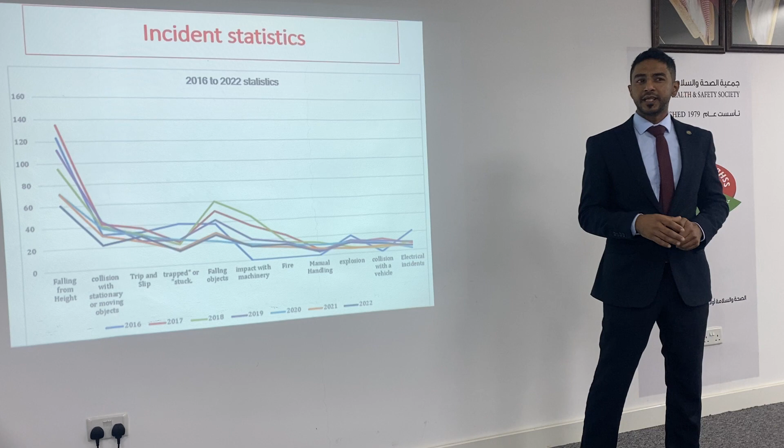So guys, let's spend a few minutes looking at this, then we will go forward. But I just want you to feel it. So there were 21 people who woke up in the morning as usual, to go perform work and never went back. Leaving behind them kids, wives, husbands, brothers, sisters, friends, and beloved ones.

The challenge is big for us as HSE practitioners. Let's have this new thing, and let me know later at the end of this session if you agree or disagree. As HSE practitioners, we are change managers. We are trying to develop a change, and when you try to develop change, you are faced with resistance. But it's worth it, because making change, preventing fatalities, preventing serious injuries, preventing this deep pain, it's worth hard work.

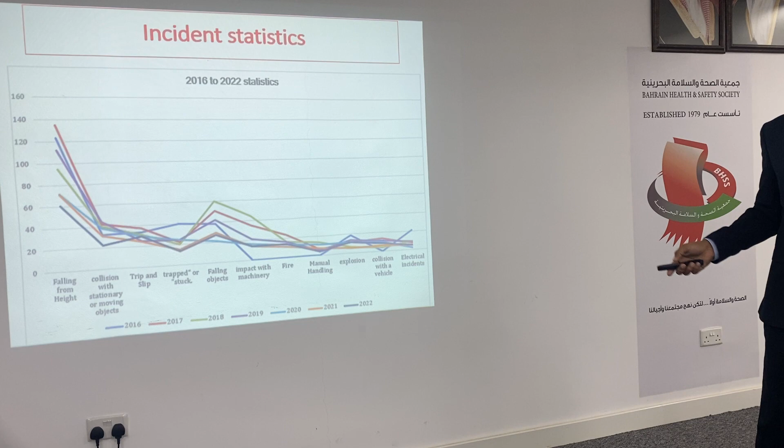Okay guys, so let's look at this. As you can see here, at the below, the years - this is the time span from 2016 to 2022. And here, as you can see, it's the cause of injuries or cause of incidents. And here are reportable incidents, guys. I know that the specialized guys know what a reportable incident is, but let me just clarify it for those who don't have background. So reportable incidents are incidents classified as majors - so sort of these are fractures, apart from toe or finger fractures, fatality, losing of sight, and so on.

See, guys, so as you can see, there are a lot of variables, but the common thing here, as you can see, is working at height. Look at this. We can see that there are some reductions, true, but working at height as a cause of reportable incident still remains the highest cause, and for 7 years. And it's not in Bahrain only, but worldwide.

Why I started with this - to tell you why we have chosen to conduct something relating to work at height. So scaffolding is not the only working at height situation where we perform work at height, but it's a part of it. I will try my best to summarize, guys, and simplify the stuff that we need to look at when we perform work at height.

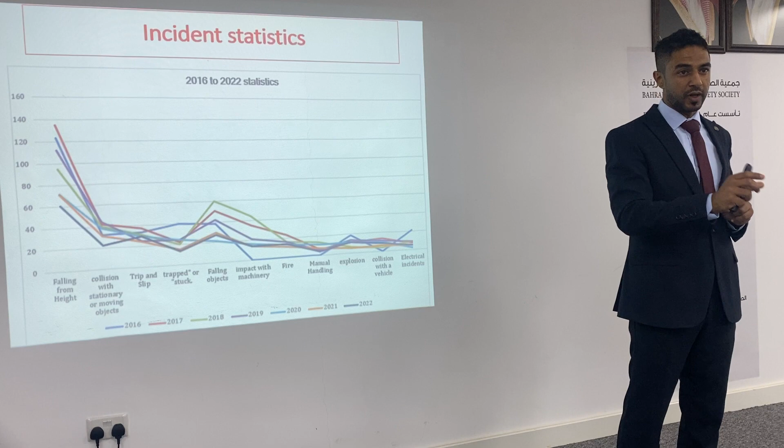Okay guys, so as Mr. Yasser said, he actually performed adequately about introducing myself, but let me just briefly tell you that my name is Ali Abdulla. I am a NEBOSH IGC trainer, HSA, and examiner as well, but for IG2 only, not for both IG1 and IG2. I'm also a trainer of some other awarding bodies like IOSH, HABC, ECITB, and so on.

So today, we will try to look at these stuffs. So this would be our agenda. You can spend a few seconds reading this. And due to time limitations, we are not going to go in depth, but try to cover the very generic and very essential as well.

So guys, let's start with this question. What are the factors that we need to consider to erect a safe scaffold? What do you think, guys?

The design of the scaffolding. Excellent, there's a design. What else? The nature of the job. Weight of the load. Excellent. Size of scaffolding. Excellent. Duration of the work. Ground stability. Excellent. The competency of the worker who works this scaffolding. This is also very important. So important, excellent. What else, guys? One more thing, type of the job. Type of the job, excellent.

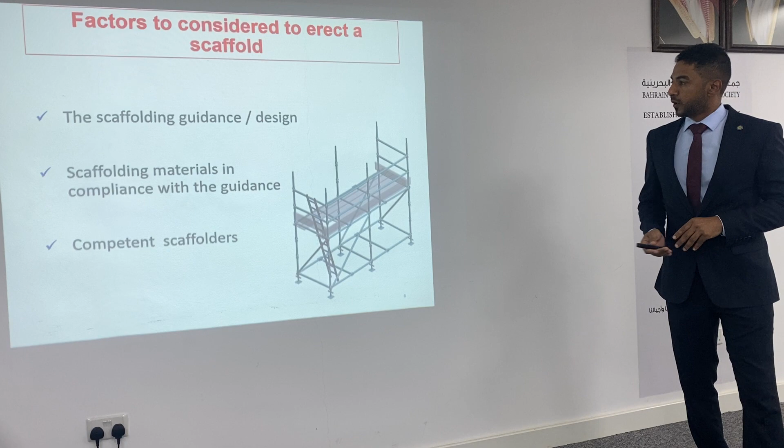So, for example, guidance. We've got these two guidance. The very first thing we need to determine is which guidance I'm going to use. Am I going to use tube and fitting guidance, NASC, or cup lock? I have chosen these two because they are very common. So what guidance am I going to use? That's the very first thing. Based on the guidance, I need to perform or erect the scaffold. The guidance will tell me how the scaffold will be safely erected to bear a certain weight. So this is the very first thing.

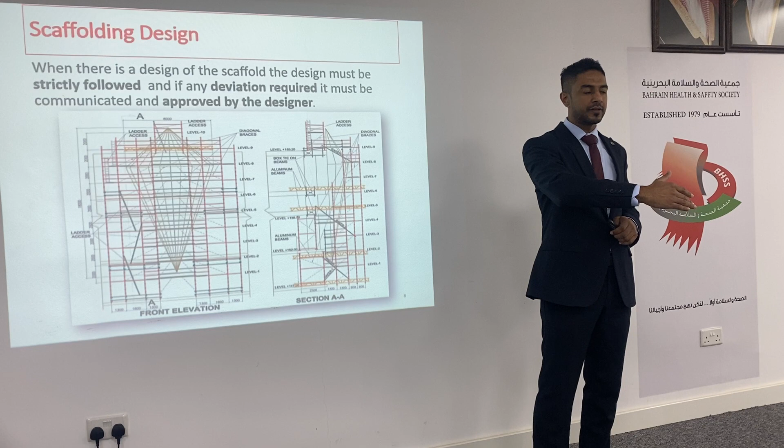Okay, let's now talk about the design. In both of these guidance documents, either TG20, the technical guidance of NASC, or the cup lock guidance, there would be a pre-designed scaffold. If we talk about tube and fitting, it's called a compliance sheet. So what is a compliance sheet? A compliance sheet is a pre-given design. It's a matrix that you use to have a scaffold which can bear a certain weight and can be used for that intended purpose.

Where there is no compliance sheet, a design would be required.

Let me tell you something interesting, guys. I believe at least the expert guys here know the types I'm talking about, tube and fittings and cup lock. Have you seen a tube and fitting scaffold or a tube and fitting mobile scaffold? You have, right? And what have you checked with it? The tag and this stuff, right? Let me tell you one fact: a tube and fitting mobile scaffold, whatever is erected, needs to be associated with a design.

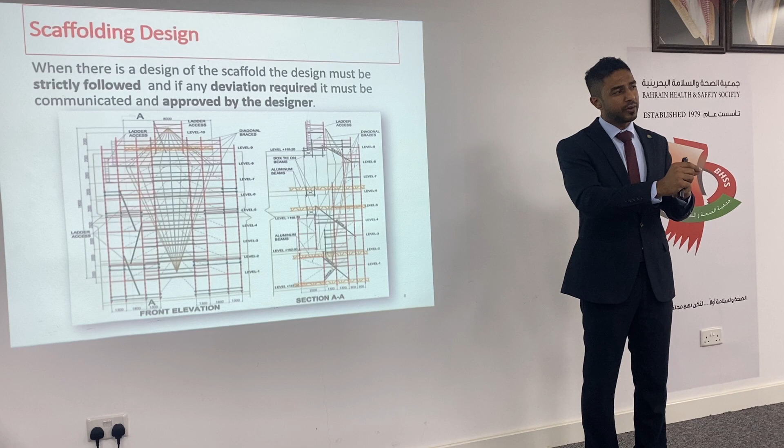Whichever is not designed does not comply with the guidance. Now let's go back to the sequence. That's why we start with guidance. Let's look at the guidance, understand the guidance, see what the guidance mentions. Then, as I mentioned, if there is no compliance sheet or no pre-given design, then we need to have a design. Basically, understanding the guidance will answer this question: when does the scaffold need a design, or when does the scaffold not need a design and you can just do it.

Okay, then material. Scaffolding material, right? Again, go back to these three things. The guidance will tell you which material to use. It might tell you, okay, use this material which complies with this standard, or it might tell you to use that material. Either the guidance or its design will determine what material needs to be used. And it will determine the spacings also.

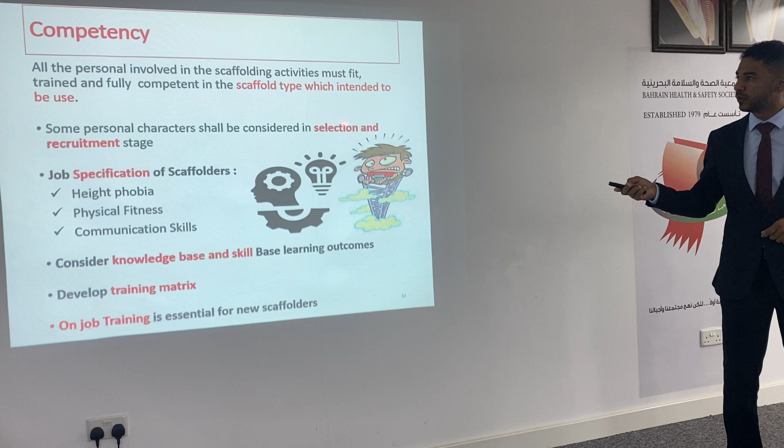In this area, we will just look at some stuff. So for example, if I'm using tube and fitting material, what is the practice here in Bahrain? You will send your guys to be trained as scaffolders, to XYZ training center. And what will happen there? They will train them how to erect a scaffold, but not all the scaffold.

And when we look back at the Ministerial Order 4, it says someone who trained or supervised by trained, but in which type of scaffold? Here is where gaps happen. So maybe someone trained in training centers to erect a cup lock system is then sent to the site and asked to erect a tube and fitting. And here is where mistakes happen, here is where scaffolds collapse, here is where people fall from height, here is where material falls from height.

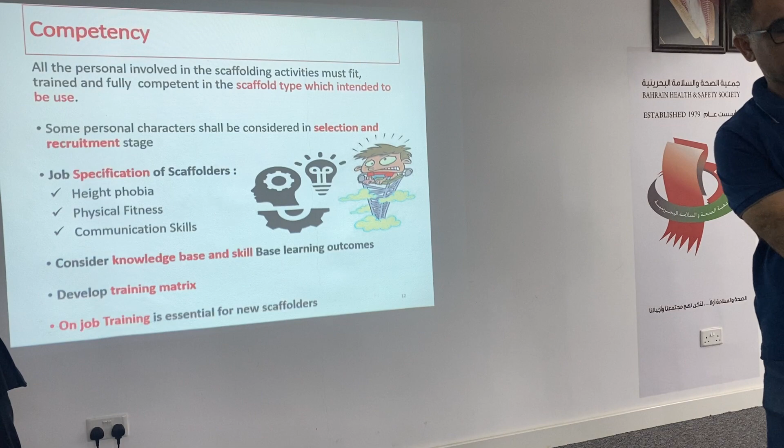So do you mean, Ali, that when you assign your guys to work training, you need to give the training based on your material, which is in your company, not a material that the institute has? So you need to go exactly specific, you need to mention specifically the type of scaffolding. Excellent, thank you, Yasser. So exactly what Yasser mentioned is what I refer to.

Now if you procure a machine, Mansoor, in your area, if I am trained in operating a machine in my company, would I be competent to operate the machine which Mansoor procured? Not necessarily, right? Like if I am trained in X machine, and Mansoor has Y machines, there would be a competency gap here. And here is exactly what I meant by competency.

So the guy needs to be trained in that particular scaffold which they are expected to erect, not something else. You train them in H-frame and you ask them to erect a tube and fitting or coupler systems, they will have a lack of competence. They will make errors, mistakes. Okay guys, so what else?

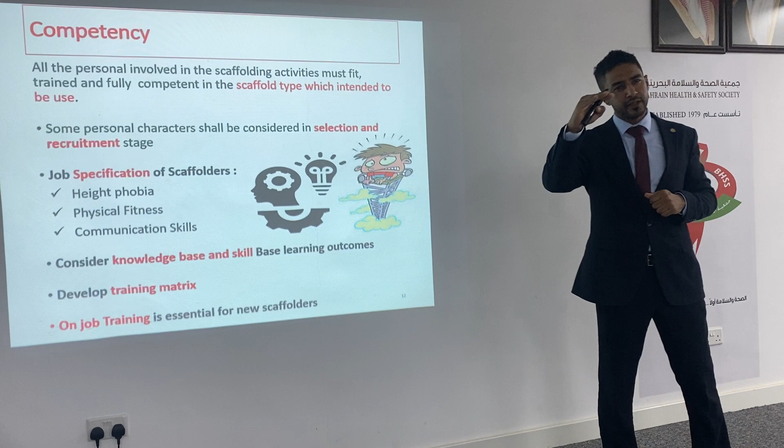So here, competency should be started at a very early stage, from the selection, recruitment, not later. Look at these job specifications. So, Mr. Habib, our HR manager, he is expert in this stuff. Can you, in 30 seconds, distinguish to us what is the difference between job specifications and job descriptions? Very briefly.

Job description or job specification? Specification, so it comes job description. Yes, it comes from job analysis, that specifies the role, responsibility, qualification, experience, and skills. Excellent, that's enough for me.

Thank you, Habib. So as Habib mentioned, you need to analyze the job. Based on that analysis, you will determine what vacancy we need to have, and what the job descriptions will look like. So here are some stuff, guys. That's why we talk about strategic approach. We mean it, we mean what that strategy is. We understood and we mean it.

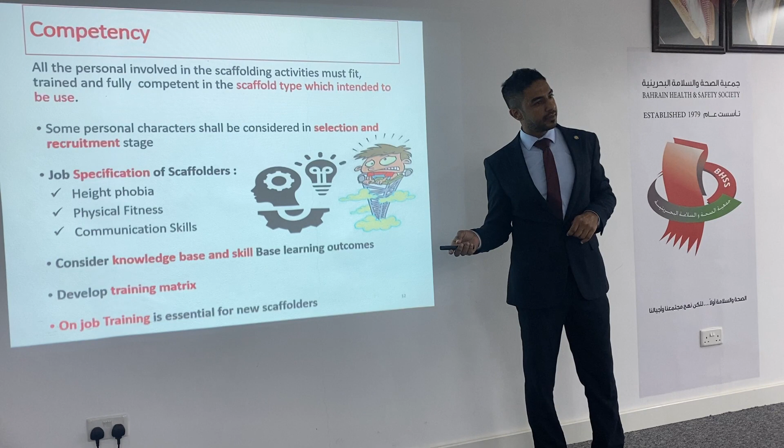So you cannot have someone who has height phobia recruited as scaffolders. Can we? No, right? You cannot go out. Then can we have someone who has pre-existing musculoskeletal disorders? No, no. And communication skills, at least some communication skills. The guys while erecting or dismantling, they need to have proper communication skills.

Okay, so all of these, like before recruitment, before employment, if you bring some people who are having something like this, they will never be competent, guys. They will never be fit.

Not because they are unfit, but because we did not consider the job specifications properly. So it should start there, at this stage.

Then when it comes to training, once I've selected the guys, we send them to the right institute or training provider, and they get trained on the right scaffold, using the right material.

Is that enough? Now I train you, tomorrow you erect a scaffold. Will you manage to erect a scaffold or no?

You will erect and put up a quality scaffold. If I bring any four of you and give you material, you will manage to erect it, especially a cuplock or system scaffold, since the way they're designed makes it so easy to erect.

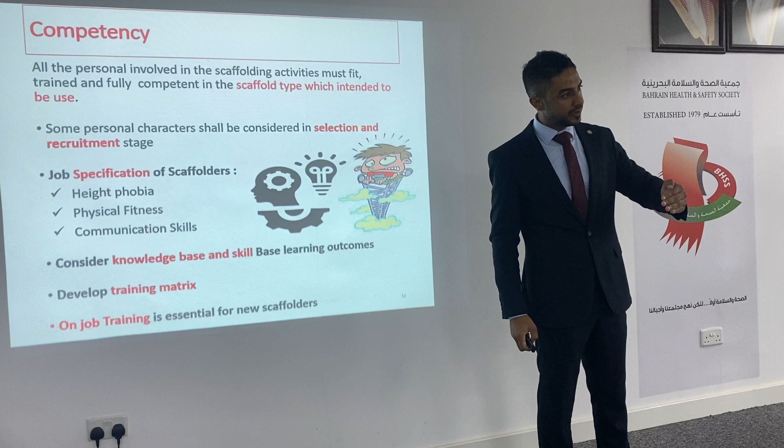So as mentioned, sending guys for 2, 3, or 4 days with training providers, getting trained on the right scaffolding materials based on the right scaffolding guidance, is inadequate. You need to consider not only knowledge-based learning outcomes, but skill-based learning outcomes too.

So for that, what we need is something called on-job training. You guys are expert enough to know how the scaffolding material looks like. Think about a standard post - is it light or heavy?

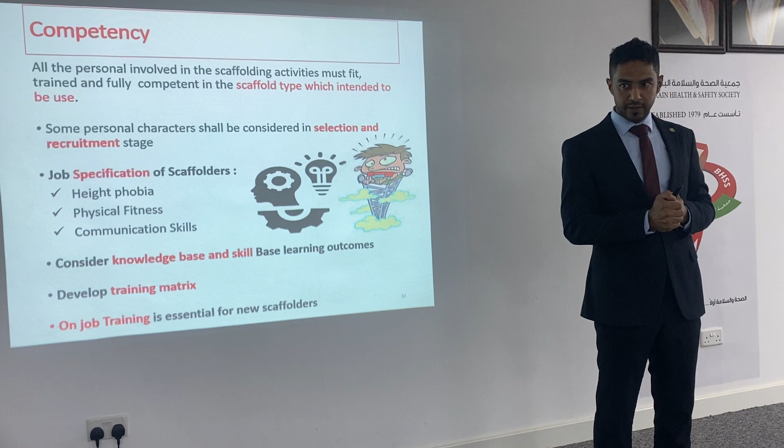Heavy, right? So think about someone who is a fresher - can he be fit enough to erect this or handle it? No, right? So after getting the right training, after understanding how the scaffold needs to be safely erected, you need to have them trained on the job.

Consider several months of on-job training, not just one week - a few months, 2 months, 3 months, where they need to work at zero level. Then, is that adequate?

Then you need to train them not only in how to erect the scaffold and use the materials, but also in several other things like manual handling, COSHH - control of substances hazardous to health - but customized based on the scaffold.

You don't just tell the guys, okay, consider this style, this task, this individual, blah blah blah, do this. No, it's based on the scaffold. There's a unique technique to be used when handling a scaffolding board or a scaffolding standard. They are unique, not generic - very specific.

So these are very important, especially for the expert guys. For you, you need to look at this and find gaps or areas of improvement in these three things. And you will find a lot - believe me, you'll find a lot of areas for improvement.

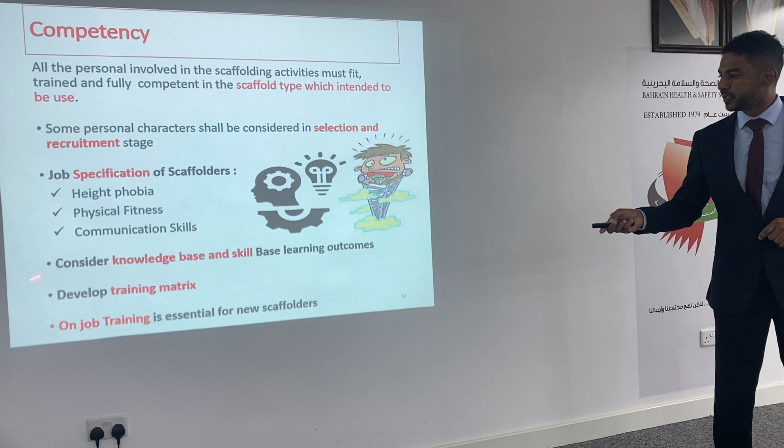As we mentioned, on-job training takes several months. And during these several months, you should be able to determine whether he's ready to erect or not. Can you give me an example?

For example, if the person is just handling material, do you mean that? See, handing over the material at the zero level, he can erect a scaffold. The scaffold can be erected from zero level. It can be, right?

And at this stage, you should be able to determine whether he's now ready, fit or not. So he will erect a tower for you, any scaffold, and you can have a sort of trade test to determine whether he's really fit or not - what I mean is that he's fit.

Let me correct you here - giving material and erecting at zero level. Yes, so he will be erecting at zero level. Yes, giving materials and erecting at zero level. So he will gain the competency - yes.

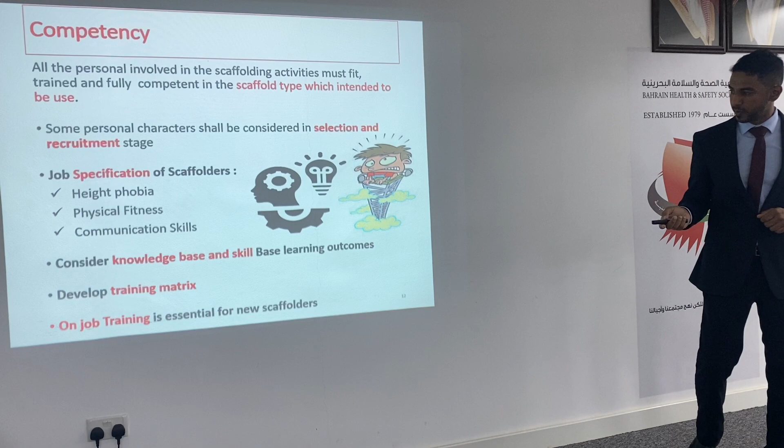The client should tell you exactly what the scaffold is intended to be used for - nature of the use, number of people, whether the scaffold is going to be sheeted or not. Let's take the example of sandblasting - they need to sheet it, right? So whether this is needed or not, the client should clearly communicate this.

If there are any hidden hazards - if the scaffold is going to be used on a site where demolition will be performed and there is potential asbestos, for example, or any hazardous substance - it needs to be clearly communicated. Also the nature of the ground, I mean any ground where the scaffold will be erected - I'll show you examples later. The client also needs to clearly communicate whether the ground is rigid enough to be stable, or loose.

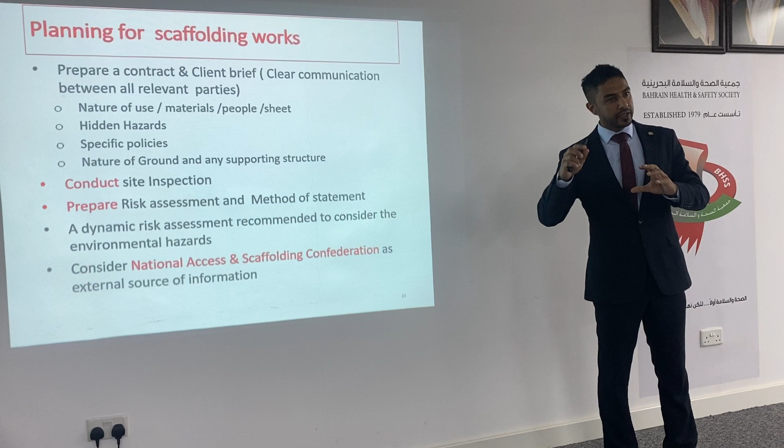Job specific - that helps fill these gaps and keep the risk assessment adequate and sufficient as required. So you mean, Ali, that every abnormal job should have a new risk assessment conducted? Every job, every job needs to be based on a new risk assessment. So every time you need to update it, based on the hazards. Yeah, so for each job we need a risk assessment, and for each task within that job we need a continuous or dynamic risk assessment.

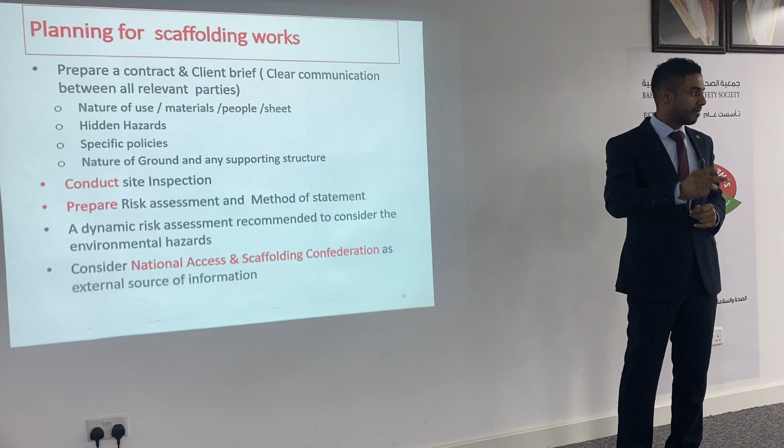It's situational. So I will erect a scaffold for Tatweer, I will give you the risk assessment. But you won't ask me tomorrow, 'Ali, we will have a scaffold in TB XYZ' - you might not ask me for another risk assessment. For this, what I would recommend is you need to have a dynamic risk assessment. If you're going to dismantle a scaffold, you need a dynamic risk assessment, which will serve to fill these gaps, as I said, because there's a lot of variety.

So guys, how do we perform risk assessment? We refer to sources of information, either internal, guidance, or whatever. When it comes to scaffolding, there are good sources of information you can refer to, and you can take pictures of these. It will help you. The National Access and Scaffolding Confederation has a wide range of safety guidance.

What's the time, Abu Ammar? It's almost half an hour.

Okay, so here are examples of foundations. So you guys, as experts of scaffold, will say, okay, this scaffold will be adequate to bear this much weight - but what about the foundations? So here the communication is required between the client or between the requesters and users.

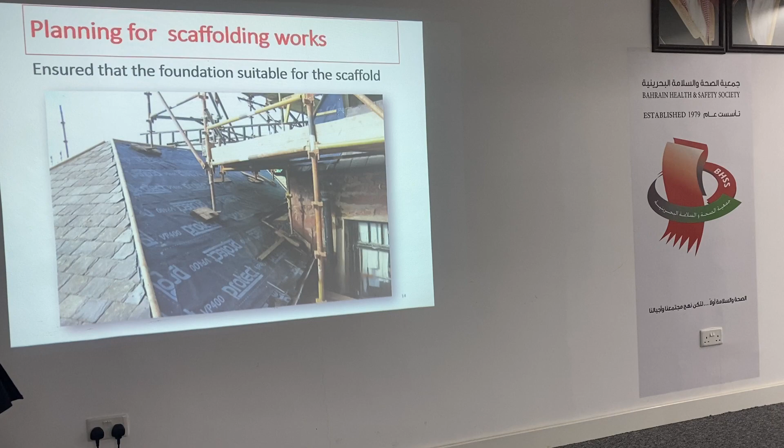Okay, here are some of the technical stuff. I will go a little bit fast to manage the time. So here are some standards, right?

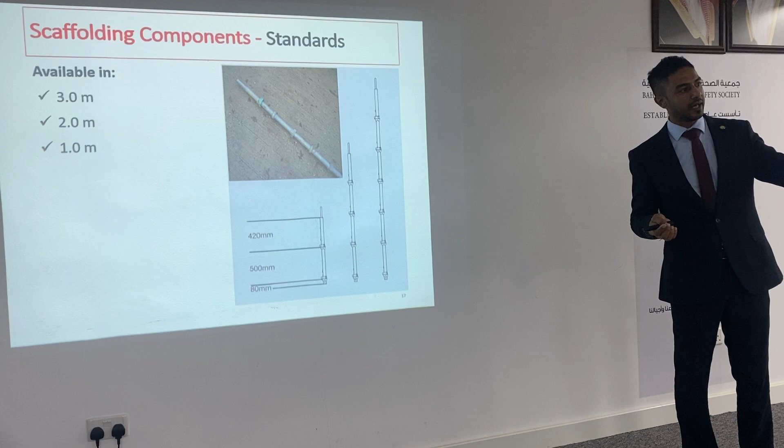This is for cup lock, guys, and it's available in these sizes. How to count the height, let me give you this idea: count these cups, divide into two, and you will have the height of this cup. So from here to here is a meter fifty centi. Sometimes you want to count how high the scaffold is, you can do this trick.

Okay, these guys are called what? Universal base. Okay, transom.

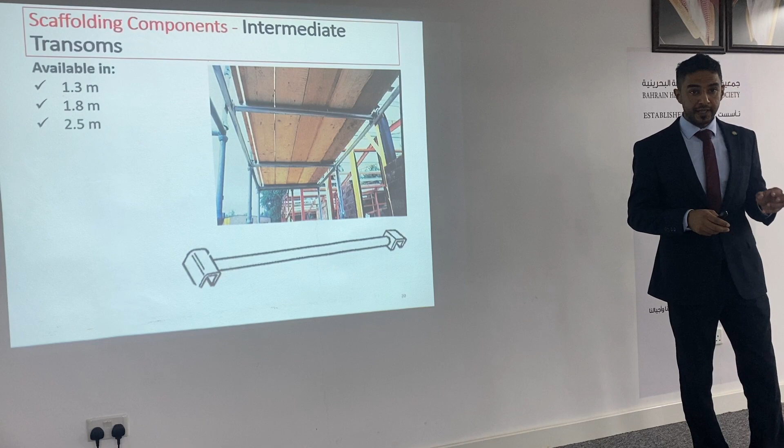So again, the guidance based on the intended use of the scaffold will determine how far transom to transom will be, based on the duty of the scaffold. We will see later how we identify the type of scaffold and the duty, the load bearing.

Also, sometimes you will have an overhead power line that can pull them, and also sometimes over uneven floor it will be difficult. Heavy also, excellent. So all of this stuff, right?

I'm sure if you think about it, you will find tens of them. But let me tell you one fact also: the caster wheel has a load capacity, of course, it's designed for static load, not for dynamic or moving load, right?

When you push a scaffold, especially cup lock or other systems, what will happen? When you push the scaffold like that, you stop. What will happen? The scaffold will stop, right? It will jump like something like this. Excellent, Mansoor, what will happen? The stop from the scaffold at the base will stop, but not from the upper part.

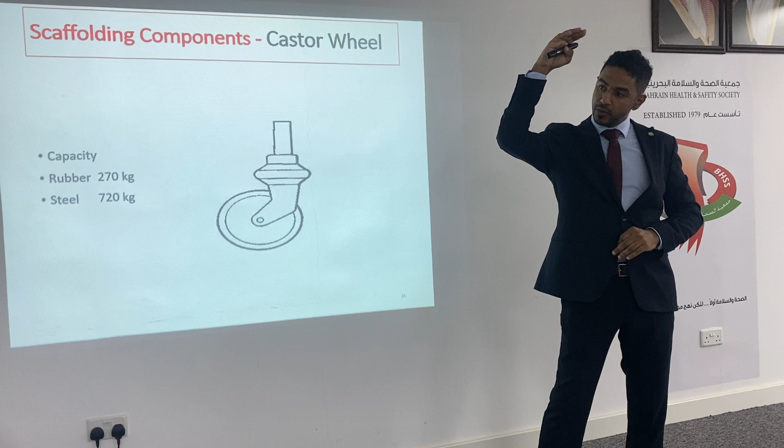Upper line, there would be movement, not vibration, it will still be in motion, right? It's movement. There will be like kinetic energy, where these parts will get broken and where it will collapse, right? So you can add these guys for that.

So later we will talk about the types of ties, scaffolding ties, but take it from now: any scaffolding ties must have this, not this. Not swivel, right angles.

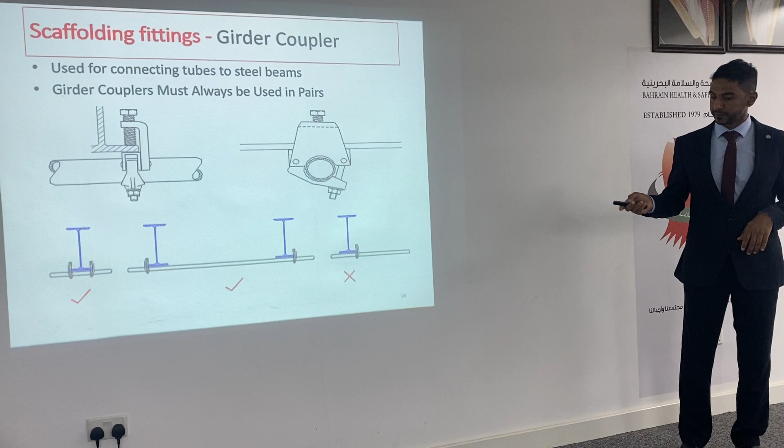Okay, putlog, guys, sleeve. Okay, this is called a girder, used to tie the scaffold with structures. What we need to know about this one is it always needs to be used in pairs.

So what is wrong here, guys? It's not in pair. So always you need to, if you have one here, you need to have another one here.

So if you follow the TG20 technical guidance, it will tell you using that... this is called TG20, guys, this is the technical guidance of erecting a tube and fitting scaffold.

So it will tell you that using some thickness, it will determine the distance between transom and transom.

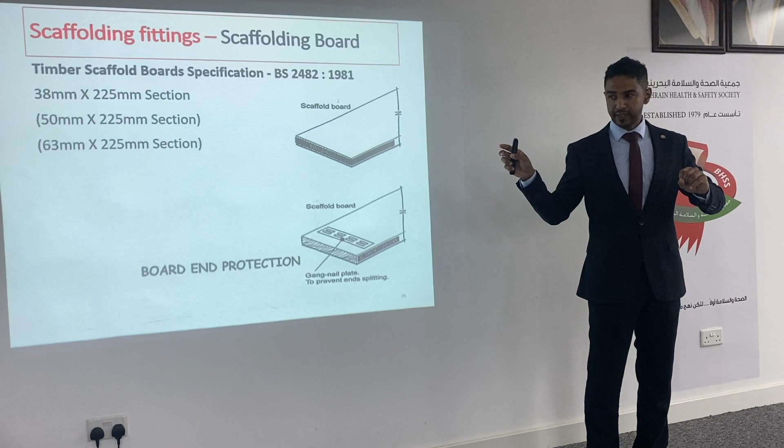So that's why if you are going to inspect a scaffold which is being inspected by a competent scaffolder, here's where we need to do, right? We are not inspectors, we are HSE practitioners. As mentioned in the announcement shared by Yasser, this course, or these sessions, is for HSE practitioners.

So if there is a scaffold being inspected, green tagged, and you have seen different thicknesses of board, you raise the flag, something wrong. You can do so, guys.

Okay, anything like that, guys, should not be used. It can be used in one condition: if it's used as a toe board or as a sole board. Anything like that, guys, should not be used.

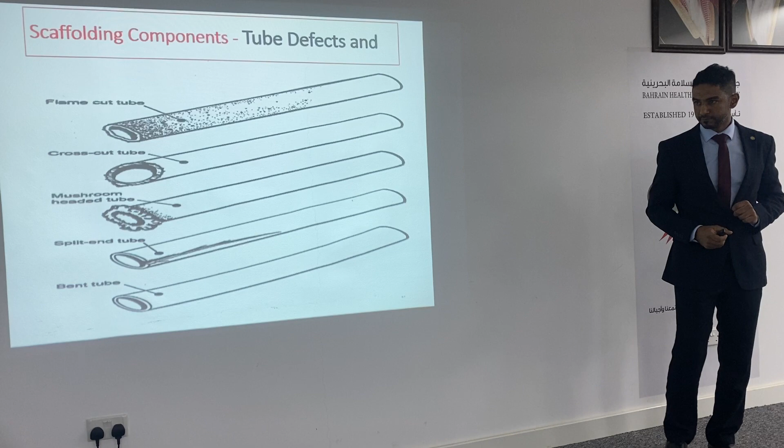Okay guys, so here bracing guys. This is stuff called bracing. Champion, you have 20 minutes.

So in bracing, what I need to inform you is that the scaffold must be braced. People do brace the scaffold, which is excellent, outstanding, good job. But sometimes they brace it out of the node point. This 300 millimeters from where the ledgers attach to the standards is called the node point. It is the strongest area, and here only, all the ties, all the bracing should be attached.

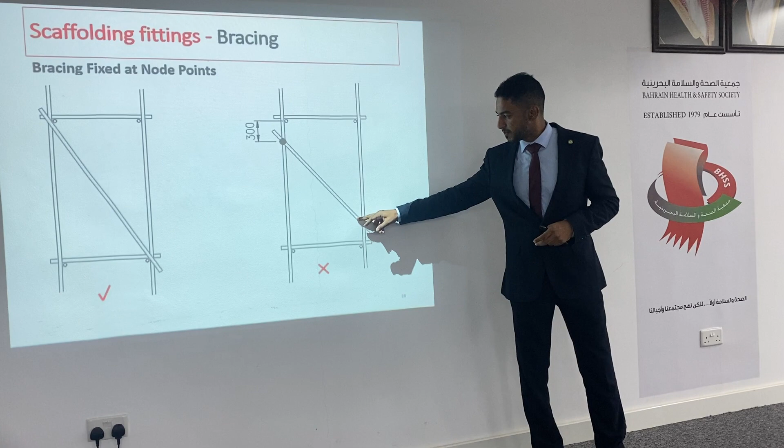Nowhere else, right? If we keep the brace here, it does not perform the intended purpose.

Now for bracing, we commonly see people utilizing tube and fitting to brace system scaffolding, which is wrong, because it's marrying two systems that are not supposed to be merged together. Excellent, outstanding, thank you Mr. Salah.

So here, guys, where we can find area of improvement: guidance, material, competence. If we manage to know and understand these three things, let's call it the golden triangle, or whatever. Okay guys, so look at this.

Look at this. So only up to here the bracing should be used, either ledger brace or standard brace, right? But if you have an extensive distance apart from the node point, it won't perform the intended task.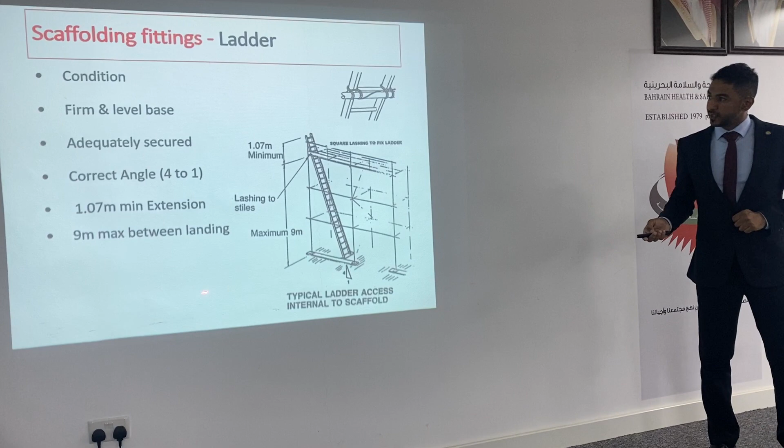Okay guys, so we got ladders also, right? So let's just briefly go about ladders. Here's a common question: can ladders be tied or secured by rope or not? Yes, it can, but using these types of lashing.

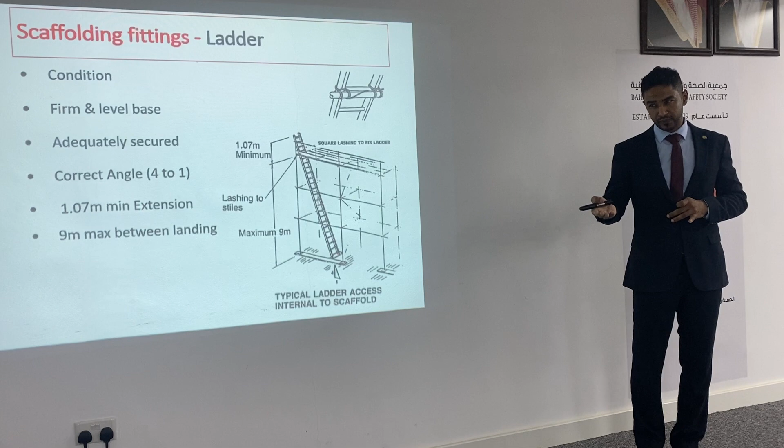Okay guys, very quickly, I'm sure you are familiar with this stuff, but I will go to the important part. The maximum height is 9 meters, but it's not recommended. Where you can reduce the height of the ladder, it's highly recommended. Reducing the height means reducing the potential or the falling distance, right?

Or they can make stages, and the stages should be zigzag, so should someone fall, he will fall to the next level, not all the levels.

Okay, then we have, guys, the gin wheel, right? So here in gin wheels, what we need to know is that if there is a gin wheel attached to a scaffold, that scaffold, in the same level or the level below, must be tied, right?

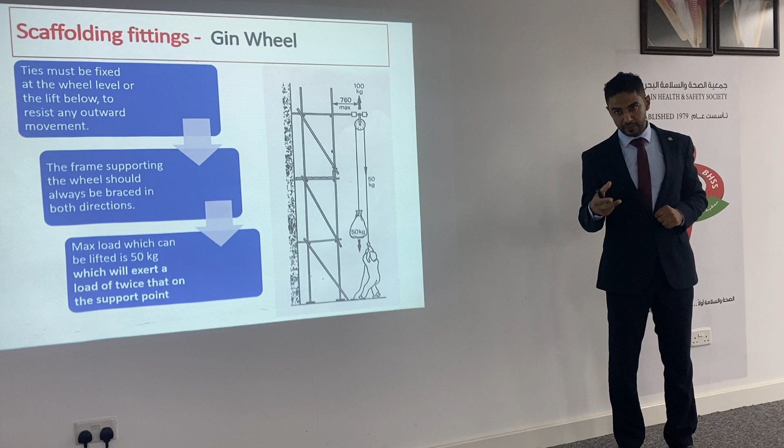Okay, then we should consider the gin wheel as lifting equipment, so it should be examined and certified every 6 months.

Go ahead, I will give you time, no worries. Okay, so this is how a gin wheel looks like.

Okay so here, guys, especially for those who are not very familiar with scaffold, I will go through them, right? So we call these things the hand rail. We've got top rails and hand rail, right? This distance needs to be maintained. Okay, so these are basic things, guys, for those who don't have any idea about it.

Then we have the toe board. So the handrails are there to prevent people from falling from height. Now, if we don't have a handrail, will people fall from height or not? What do you think? Of course it will.

Right, why? A lot of scaffolds without handrail, no one falls - lucky, okay? But it's there to prevent falls, which is unintended, to prevent mistakes and so. It's there to prevent people from falling from height, right? But usually no one has the willingness to fall from height, right? But it happens mistakenly, so that's why it's there.

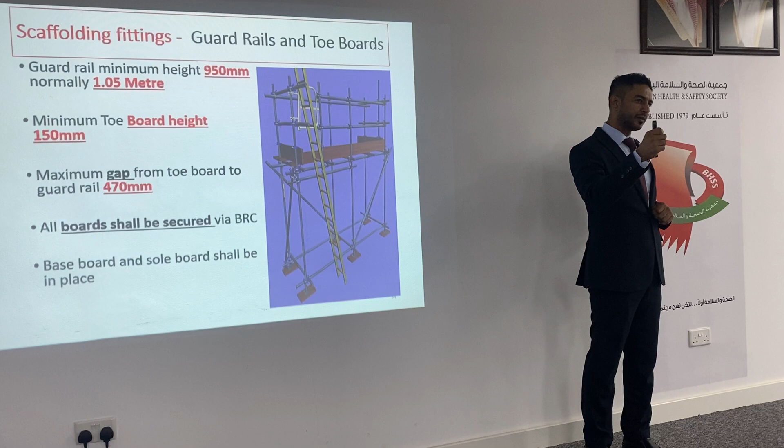It's not, I really believe, if I'm not wrong, guys, correct me, back then it was not a requirement. A drop bar was accepted. Yeah, but it's still something similar. There are things that will be dictated by the situation, and what is agreed by the team of practitioners or professionals who are on the job, depending on the kind of hazard, the kind of skills of the non-scaffolder users of the scaffolding system.

Go ahead, Abu. I think in the earlier presentation you mentioned that we should also refer to the company policy as guidance for erecting the scaffolding. So if it's not a requirement, it could be part of the company policy. Excellent, true.

Let me give you a practical example. I have seen a situation where the company decided to have swing gates on all scaffolding, then they discovered they don't have them. So what happened? They decided, okay, on the lower tier we don't need to have them, but at the higher tier, third tier onward, let's have them. So it depends on the situation, available resources, and so on. Thank you, guys.

And also, similar with Mr. Abdullah, there are companies that initially started with drop bars, then there was an incident where the drop bar was not properly fixed, it fell down on someone's shoulders and they got injured. So again they did a reassessment, a risk assessment, and then they implemented swing gates as advisable, also depending on the situation. So as you mentioned, guys, it depends upon the organization's policy and so on.

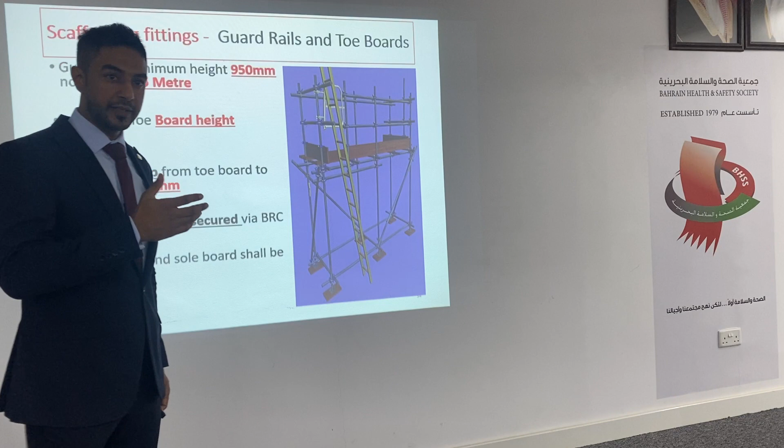But it serves to prevent mistakes mainly. So if I'm walking like that, I'm not thinking about my legs, it's online thinking. I'm just walking, I'm not thinking about my legs, right?

So where there is potential for this stuff, online thinking, people are too focused on their work and just want to perform their work, there will be human errors. So these measures serve to prevent incidents of this nature, human errors.

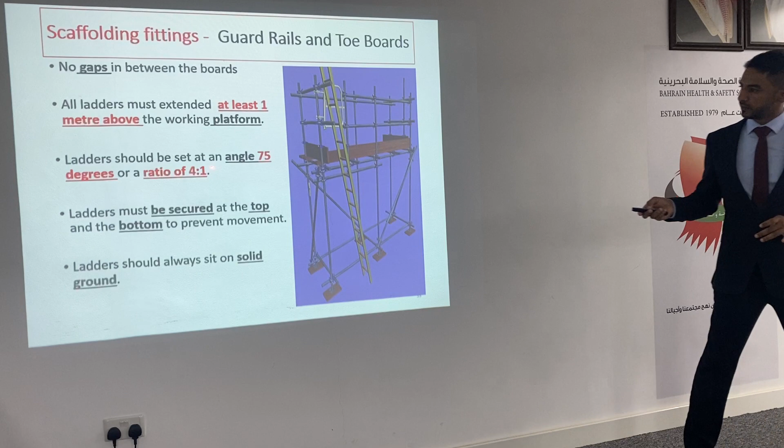For escape, the ladder needs to be extended at least 1 meter or 5 rungs, with a ratio of 4:1 - each 4 meters requires 1 meter offset. It needs to be secured even during erection, by the way. This isn't the common practice, but it needs to be secured.

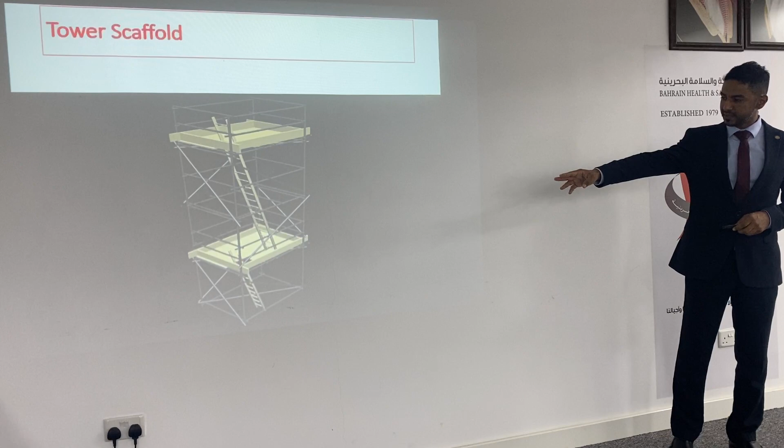Okay guys, let's look at some common types of scaffold. I'll need to speed up a bit. So we have towers. How do they classify these common scaffold types by looking at the standards? Like towers have a certain number of standards. If these towers have wheels, then they're called mobile towers.

Then we have independent scaffold. All independent scaffold will have 2 rows of standards on it. It doesn't matter about the length, how long it is - only 2 rows of standards, only 2 rows. So it's called independent.

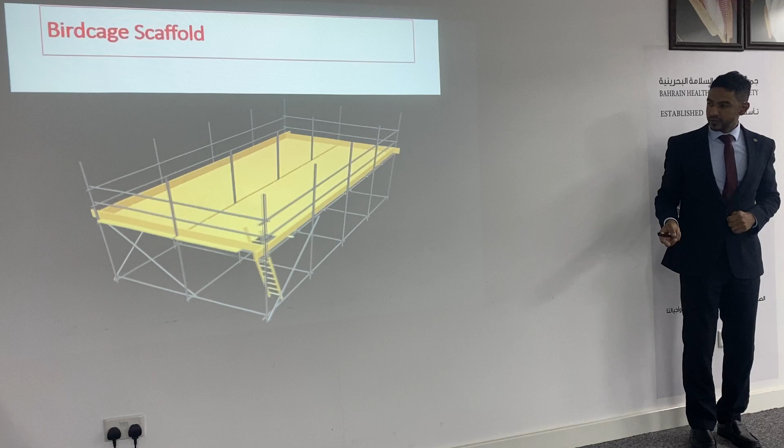Then we have bird cage, with at least 3 rows of standards. So it's called bird cage. Why do we need to look at this, guys? To spot abnormalities - something not fitting in this matrix. Raise the flag, check if it's covered in the guidance. If it's not there, what is the design, and so on.

These are the recommendations based on the catalog as well, for maximum freestanding height. For mobile towers we use 3.5 as the ratio with the minimum base dimension - the closest distance between standard to standards. Multiply by 3.5 and it gives you the maximum height counted from this area to the platform, excluding the handrail. And this is for statics.

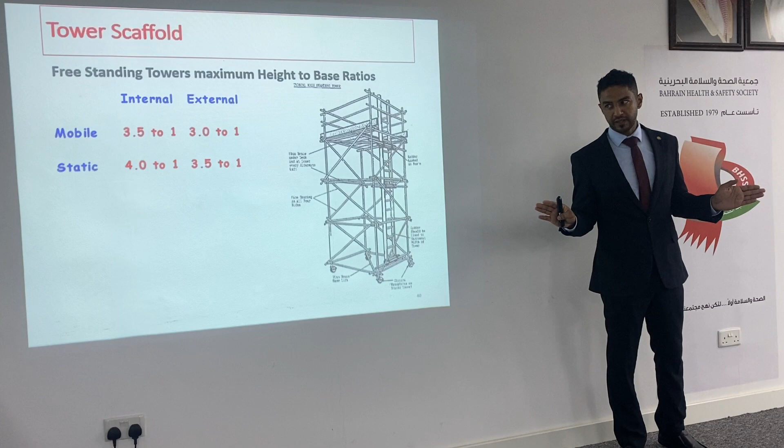And we have internal and external. What factors do we need to look at here, guys? External and internal - wind, exactly, the wind. If it's internal but there is wind, consider it as external, because the main factor to consider here is the wind.

Okay guys, so these are some types of ties. You will see some scaffold ties with ropes, some with clamps and other methods. Take pictures, guys, so you understand how it should look like. This is called reveal ties - here's how it looks.

Let me remind you about this piece of information. All ties need to be secured by 90-degree couplers - not swivel, no swivel, no putlog. 90-degree coupler, okay.

Okay, so reveal ties - we also have box ties.

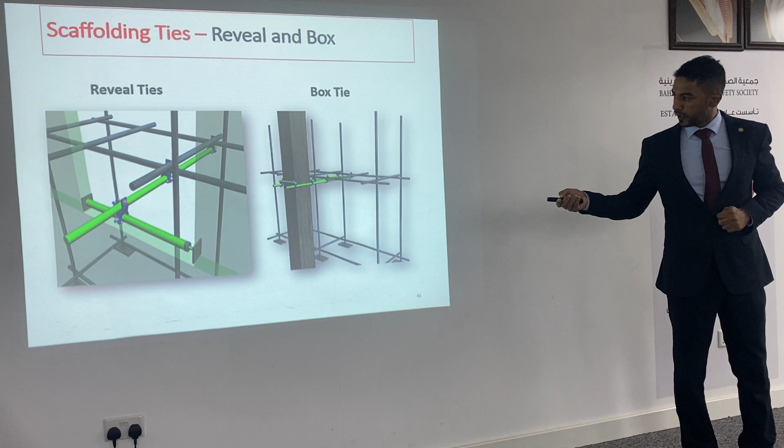Then we have throw tie, okay, and masonry tie, which looks like this.

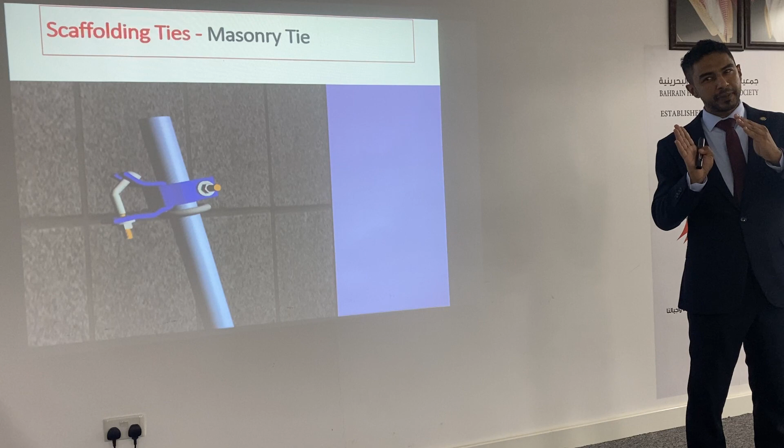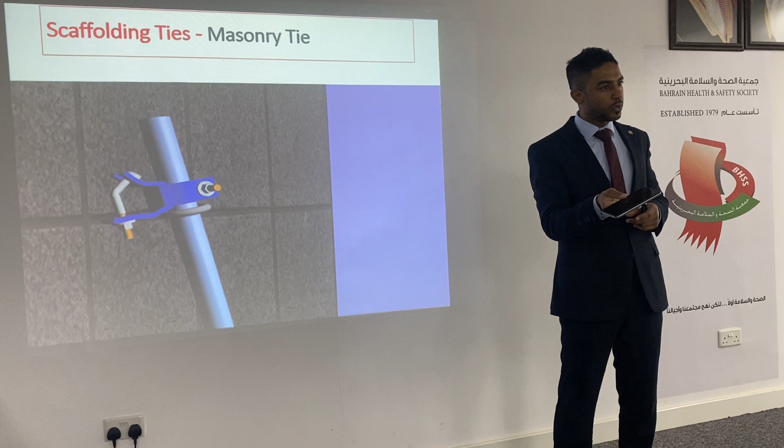Assume this is a scaffold. What do you think? The scaffold won't tend to collapse like this - it will tend to collapse either like this or like this. So ties need to be tied either here or here. Unless it's not practicable, in which case you can tie it somewhere else. But basically you need to prevent movement like this, because it's not practicable to leave a scaffold collapsing that way.

Just consider this one, guys - this is the guideline. When masonry ties are used, guys, they need to be tested. If it's not tested, it's not standard, it's not certified. Practices like using nails or something similar do not serve the intended purpose. It needs to be tested.

Okay guys, let's talk quickly about protection of the public. If the scaffold is erected where there is interaction with the public, like for example on a pavement, all these areas need to be protected by foam or anything similar. You need to ensure there is adequate lighting, no sharp edges, and you need to think about people who are blind or have special needs or disabilities.

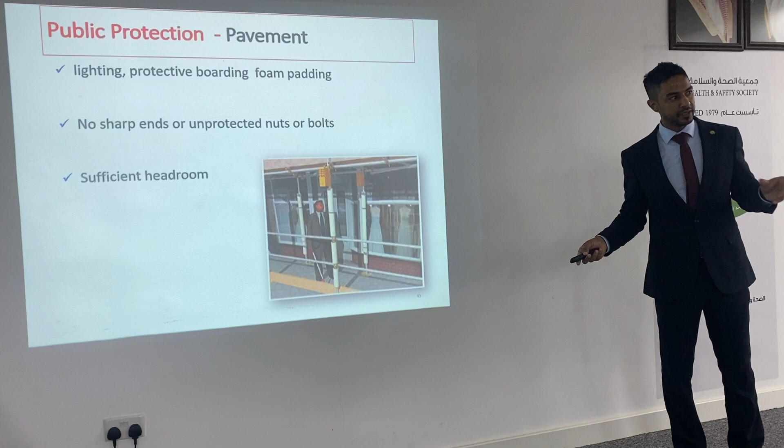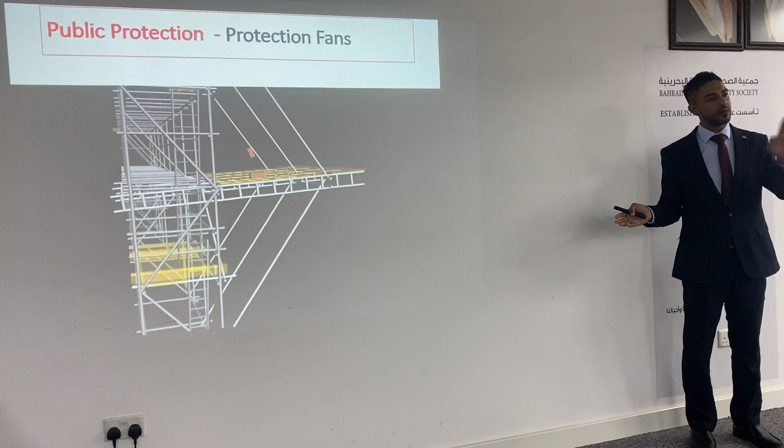Let's look at this, guys. Why should it be sloped like that? For this reason: look at the stuff, it brings the falling object back to the scaffolding site, toward the scaffold body, not outward.

This type of protection fan is very heavy duty. There is ladder, see? Scaffolding ladders, not normal ladders. Scaffolding ladders, excellent.

You know why, guys, they put the rope under the leg? Because if you stand suspended for 15 or 20 minutes, you might die, because you will have suspension trauma in your legs, so tight. That's why they put the rope like a sling to stand on.

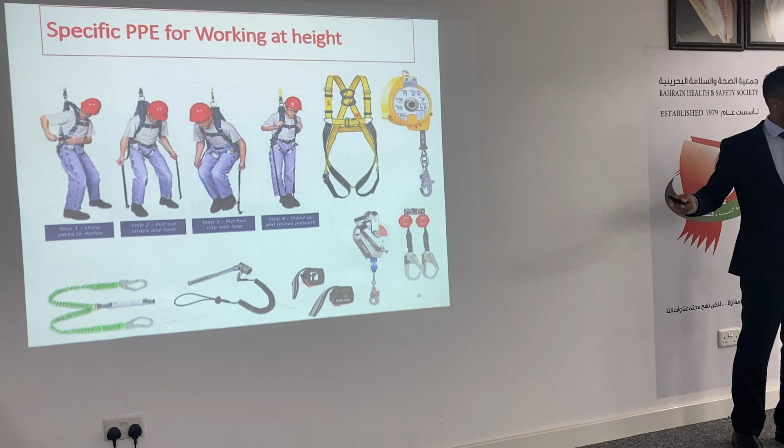Good question from Justin. So we need to consider, when using the harness, the free falling distance. We've got the height of the harness, the lanyard, the shock absorber, and the height of the user.

At a greater distance you can use this, otherwise you can use this stuff, practically. So there are some scenarios where if the lanyard with the shock absorber deploys, the falling victim might hit the ground. In this case, we typically tend to advise to bypass the shock absorber.

Is that acceptable? Retractables would be something better. No, I mean a lanyard with the shock absorber. Once we calculate the fall distance, we can see that the system will remove the shock absorber. We typically ask people to bypass the shock absorber and hook the lanyard to the harness from this point. Ah okay, I get you.

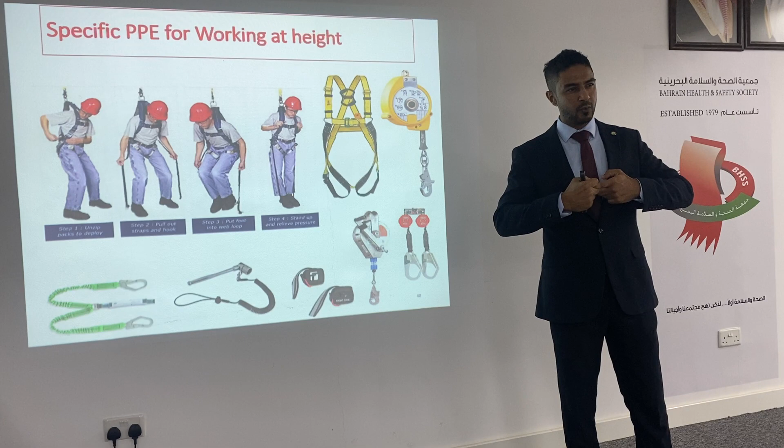So is this acceptable? Yeah, there are some lanyards which have the shock absorber built in. It's not too elastic, but it's sort of elastic, because what will happen if there is no shock absorber and someone falls down directly, he might sustain dislocations, fractures, or stuff like that. So there are some special lanyards which can be used in that circumstance, or retractables, or softening, grounding, stuff like that.

But what he means, Ali, is if the lanyard itself doesn't have the shock absorber, what happens if it doesn't have that feature? What I understood is that sometimes they don't have the free falling distance, so they ask the guys to bypass the shock absorber because the shock absorber won't serve to protect the guys in this scenario. I agree with what he's saying.

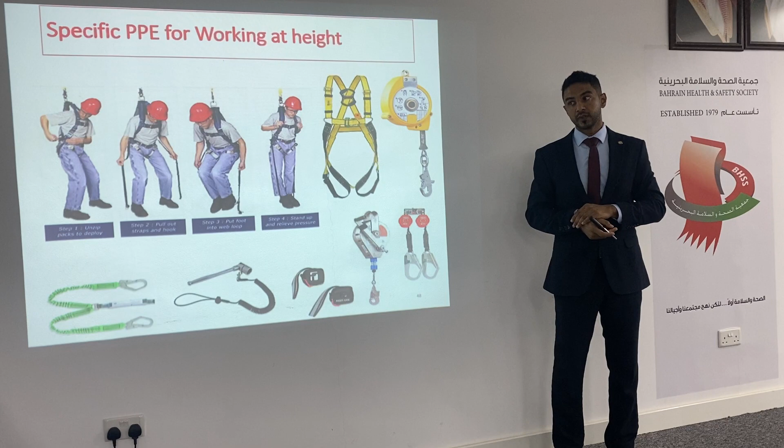What I'm trying to say is it depends on the height - maybe not a required type. Depends on the lanyard. In that height, yes - whatever height mentioned, if you bypass the shock absorber, it may not be required. But if you're going to more height, it may be required.

If you bypass the shock absorber, you need to have a lanyard that's a bit elastic, because this shock absorber is there for a reason - it will have impact. So you need to select the right lanyard in this case, or retractable stuff, because the lanyard has better sizes. Standard is to go for a retractable one, though retractable may be expensive.

I just want to add - you're mentioning if they already have that material and want to do cost cutting, so they're asking if they can bypass it, right? I believe the best group of people you need to ask is the supplier, since it depends on the manufacturer. I just have an elaboration.

The question is: why the shock absorber? We need to ask ourselves why there is a shock absorber. That's the first question. Normally the hook point is rated at 2.2 ton, which is 5,000 pounds - that's the requirement and recommendation. This is what the hook is saying. Why do they make it 5,000?

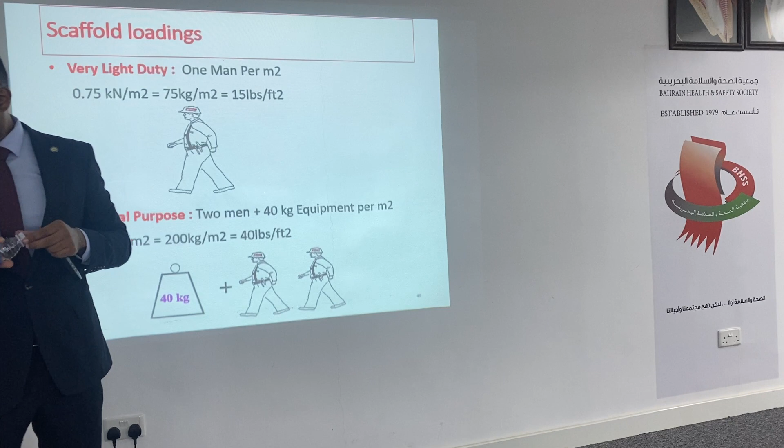If a normal person, say 100 kg, falls down without the shock absorber, the force will be around 2 ton. The shock absorber will lower it to 900 newton, which is like 300 kg. So the shock absorber absorbs the shock, but the anchor point is very, very important - that's why on the hook it's always rated 5,000 pounds.

This is the standard. But the standard says we need to hook it to somewhere that can take 2.2 ton.

But to answer you, bypassing is not allowed unless it is recommended by the PPE manufacturer. And again, for the lanyard, some lanyards say the free fall plus the height of the person will be 3.8 meters - some of them more than that. Again, it's not 1+1=2, it depends upon the manufacturer. What the manufacturer says, we need to follow - as simple as that. Bypassing by ourselves is not recommended.

Excellent, thank you. This is one of the important calculations you need to know about.

Okay guys, so we got the scaffold categorized by this guidance, which we mentioned earlier as very light duty - here are some situations where it can be used. So 2 men and 40 kg, right - general purpose. Usually they use kN, kilonewton, per square meter. So for very light duty, we need to look at the load bearing of the scaffold to determine whether the material loaded is too much or not.

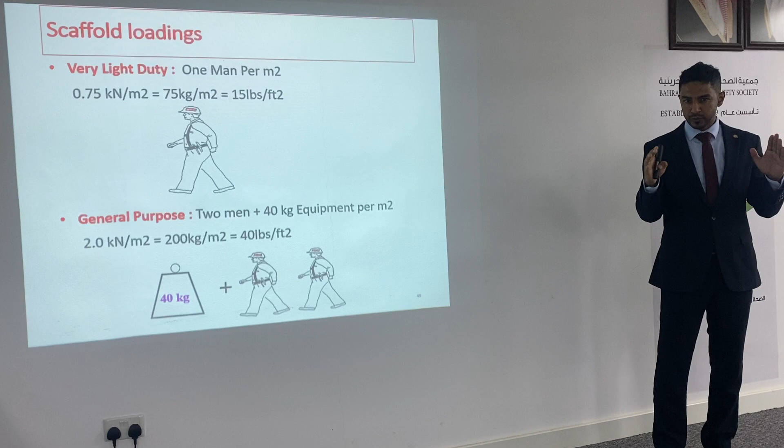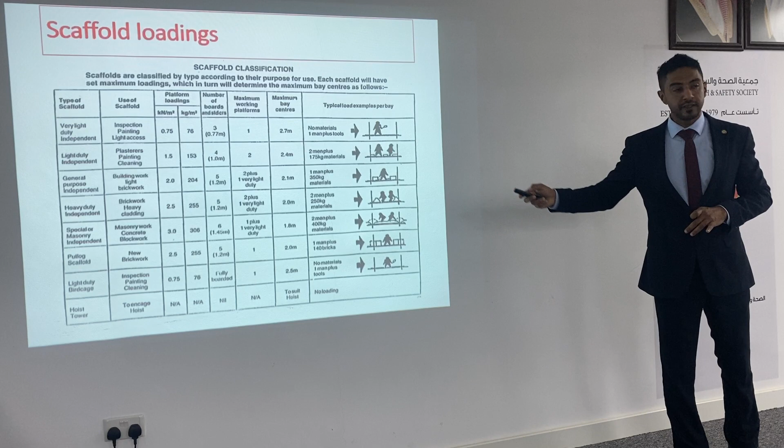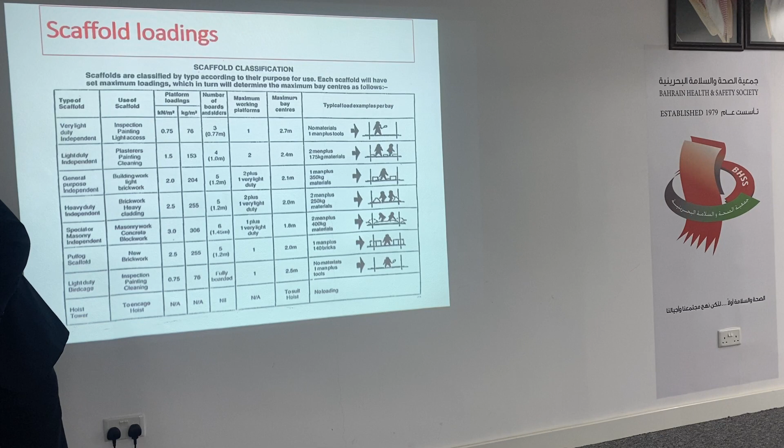So if you look at this, the farther from standard to standard, the less load bearing, right? Look at this table, guys - the load bearing will be concentrated in this area, not in that area. Same concept - so the scaffolding designers calculate the weight based on this.

Okay guys, so very quickly - when should a scaffold be inspected or re-inspected? After completing the use - excellent. Before the very first use.

After modification, and adverse weather conditions like excessive rain and wind. Also when there are changes, scaffolding modifications, depending on work requirements, you need to adjust the platform or the handrail. The competent person has to come themselves to re-check and re-inspect as well.

Here are some other triggers, like accidentally being hit by a vehicle. So anything, as mentioned, like this. What is the minimum requirement for re-inspection?

The very minimum before first use is essential, then every 7 days, weekly. This is even recommended by the local law, by Ministerial Order Number 4. Our local law does not describe what exactly needs to be done and when, but it recommends 7 days. The tube and fitting guidance also recommends 7 days. There's no strict recommendation for the tagging itself, but to facilitate verification of inspections, we need to have these tags for all of these, starting from the very first use.

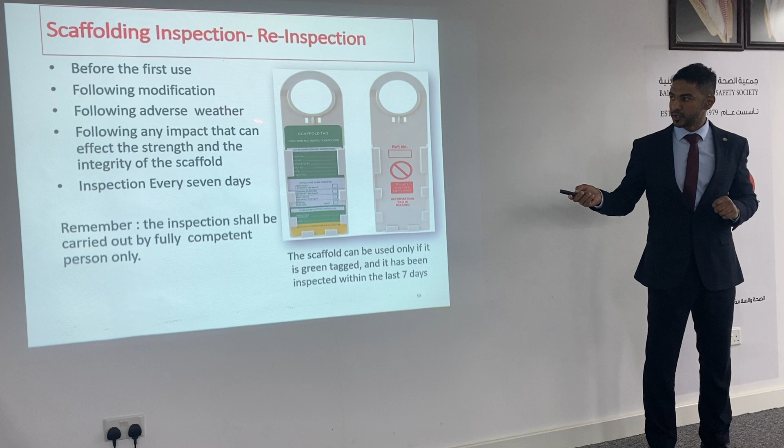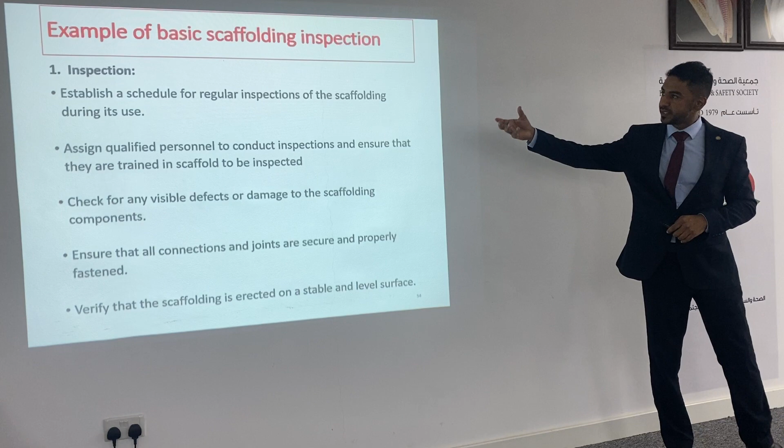Following modification, any impact that can affect the strength or integrity of the scaffold needs to be inspected after that - think about excavations, piling, vibrations, whatever. For these, you can just take pictures and read it later. These are very basic examples of inspections, but remember, you need to link the inspections to the guidelines and guidance.

Mr. Ali, when do we need to conduct ground testing, I mean ground bearing capacity testing? As a scaffold erector, you don't need to - the ground owners need to, not you. That's why, if you remember, in planning for scaffolding works we mentioned there should be a communication arrangement. The ground owners need to verify whether the ground is capable of bearing that weight or not.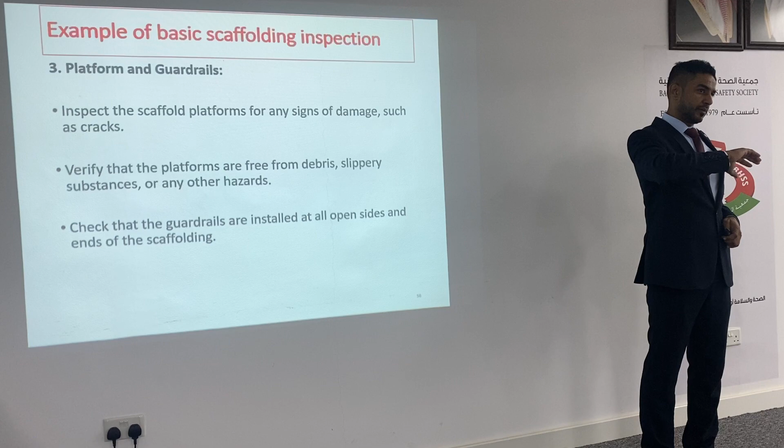Basically, how they calculate the weight: they look at the self weight, which they call dead weight, the component of the scaffold weight, and they add the active weight, the intended imposed weight. For example, take light duty, say 1.5 kilonewton - they multiply this by 4 and add it to the self weight, and the ground needs to be able to bear this much. Your scaffold should bear this much weight, so the ground should be able to take it, because in the scaffold, we put load on the scaffold, and the scaffold releases the load to the foundation. This is the basic concept.

Okay guys, you can take pictures of this also.

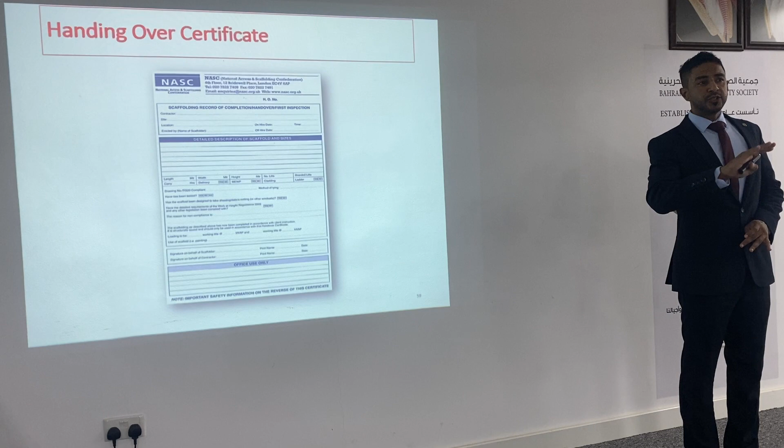Okay, this is important stuff. The tag is not enough, not adequate. You need to have something called a handing over certificate. When you hire someone to erect a scaffold on your site, they must give you a handing over certificate telling you what this scaffold is erected for, what are the limitations, and so on. This is good practice recommended by TG20 and international standards. You need to have a handing over certificate, and this serves to protect both parties - the user and the requester.

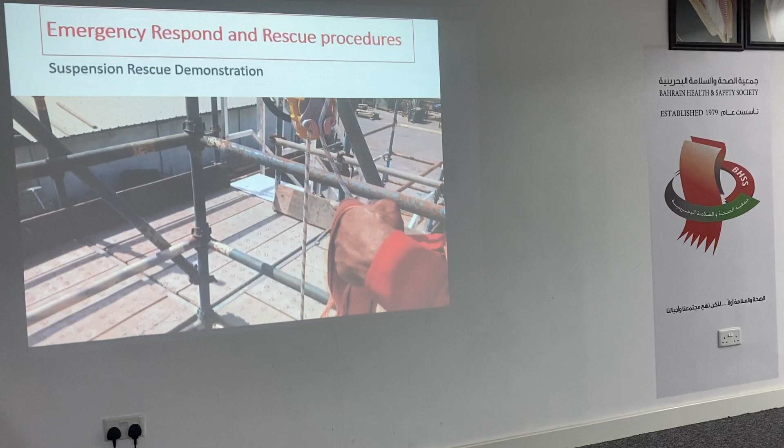So it should go by itself, but it was too light for that. So it should go.

What if you don't have the option to lower the victim down? Is there an option to take it? You can take him out using this one also. This is for horizontals and this for edge protection. So this is for that particular equipment, right? But as the gentleman mentioned earlier, you need to refer to the manufacturer's recommendation for this stuff.

Okay guys, so let's look at these, work them out together, and we will end up here. So what's wrong here?

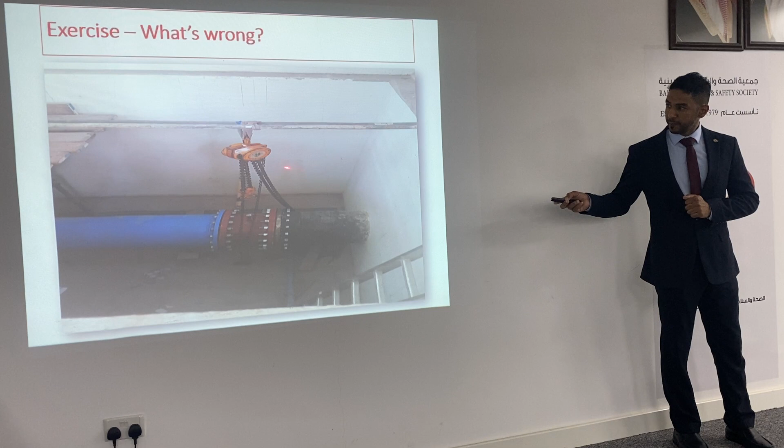They use the tube as the support, as a load-bearing device. So they use it as a load-bearing device, and it's not for that purpose. Since it's not sufficient, clearly it's an unauthorized modification. So basically what will happen in that scenario? It will be overloaded and collapse.

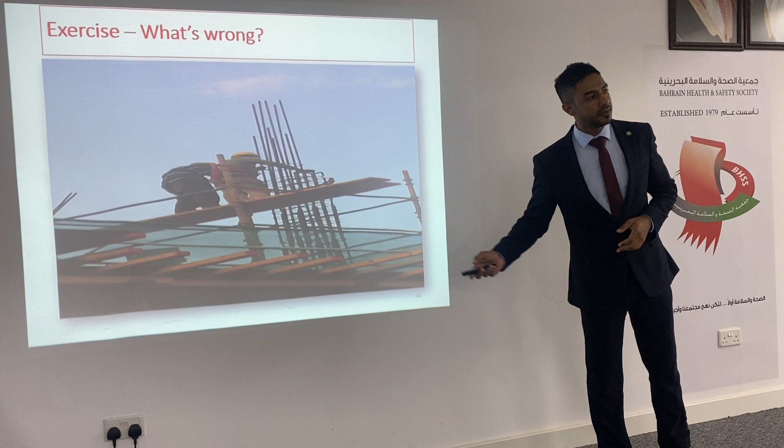So what's wrong here guys? No guardrails, right? Okay, someone might say they are still erecting it, it's not ready yet. Still, it's wrong. Why? Because there is no intermediate transom. Even during erecting there is a sequence they should follow to protect themselves as they go. If there is internal crack here, they will fall down. So the intermediate transom should always be there.

Okay, what about this guy? The boards are not tight, not tied with the scaffolding. Should they use a rope, or should the board not be tied here? No, it's added. We mentioned about the height of the mid-rail, right? Having this, what will happen? It will lead to overreaching. So comparing with our height, the mid rails or top rails will be lower, so it will not serve its intended purpose.

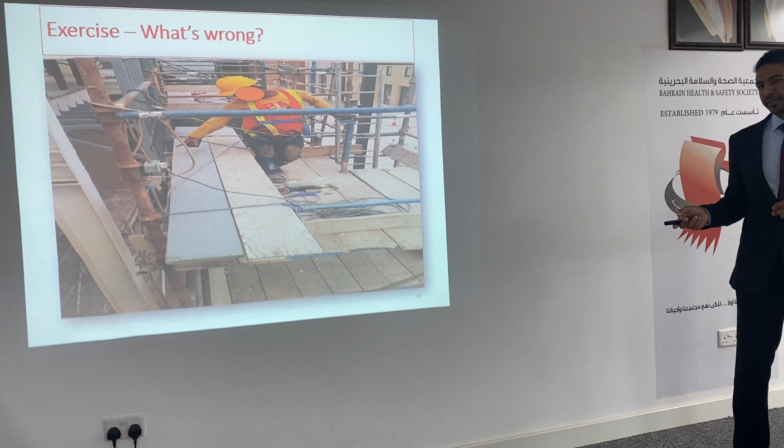What else? Instead of the board clamp, is a tie rope permitted to tie the boards on the scaffold? No, it should be board clamps. There is no permission for tie rope. Legally, like I'm talking about TG20, it should be clamps. But if there is something else recommended, it's fine, but it needs to be recommended by the guidelines.

What's wrong with this board, guys? Different color - is this not a scaffolding board? No, it is a scaffolding board. They're two different boards, but they're not tied separately, so it's loose. It can move up, it can be loosened.

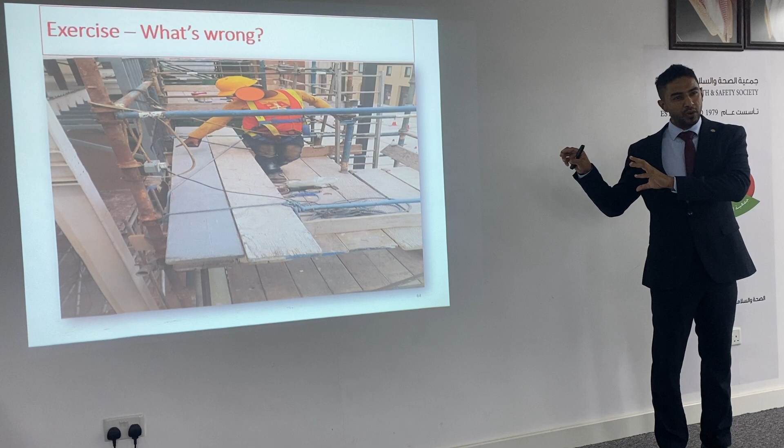Painted? Yes, it's painted. Who said painted? Excellent, painting. So what's wrong with painting? It also will not show any crack or damage. It gets slippery - excellent, it will reduce the coefficient of friction. What else? Explain. Good one - flammability. Actually this is the scaffolding board, it's made of a type of wood that won't catch flame. It will burn, but it will not catch flame. Is there any layer on the scaffolding? No layers, but they have fillers sometimes where there is overlap, to prevent tripping. So painting hides these characteristics of the board.

Excellent. So what about this, guys? Gaps between two boards, all this stuff, right? What about this?

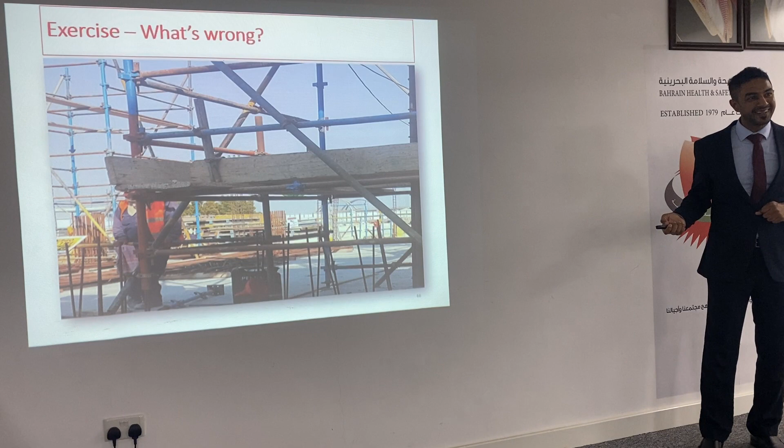Merging a wedge type system scaffolding with coupler bracing - excellent, excellent. So mainly this is where we face the problems, mixing the materials and like that, right?

Okay, what about this? This should be good - it's outstanding, the best scaffold. The ground support is not allowed, there's no base, no down support. Actually it's not supported. See, if you remove the ladder, it will collapse.

Okay, what about this, guys? Toe boards on the left side are also at different levels, overlapping. So having these boards there, basically this was done not by the scaffolding company but by the user. In this case, it might be the fabricator or the welders who need to gain reach, and that's where the problems happen as well. That's why we said a handing over certificate is a must.

For you to protect yourself as a scaffolding company and for you as a user of the scaffold - otherwise, if this communication is not documented somewhere, it's as if it's not there.

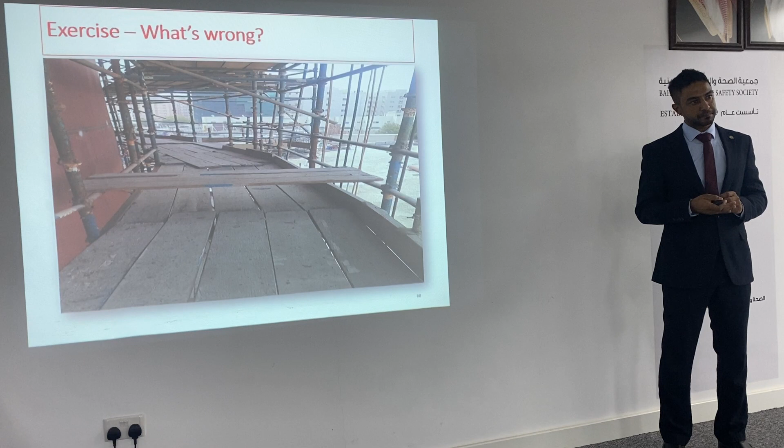But practically, if the scaffold gets altered so frequently, every time you do an alteration do you issue a certificate again? No, you can use the tagging system - that's a valid point. But in the contract terms and conditions, you need to clarify this clearly. You can mention in the scaffolding tag's yellow area some details, but if there is a huge or designed scaffold, the terms and conditions must be clearly documented in a handing over certificate.

Is overlapping allowed? No, that's one of the mistakes here. Fillers are used to get rid of this problem because overlapping creates a tripping hazard.

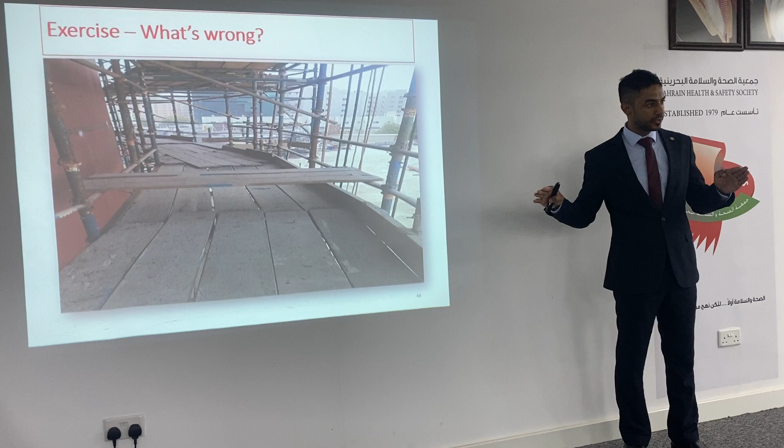Think, guys, about the explosive panel, or an electrical fuse - it allows a certain current to an ignition source, and when it's excessive, what happens? It burns. Same here - it should be less integrated into the scaffold, so if there is excessive wind, it should fly away.

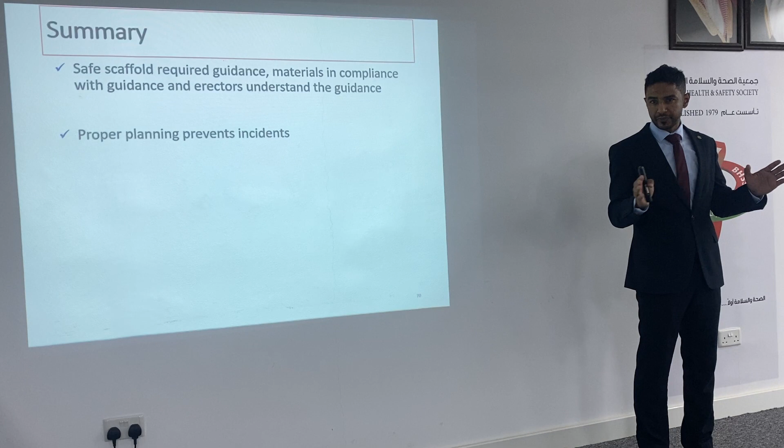Okay guys, the most important thing we covered is that any scaffold must have guidance. We need to start with guidance and understand it. The guidance will tell us clearly which material to use, and we should use only those materials, not something else. We cannot use a tube and fitting guidance on cup-lock or aluminium or whatever - we need the right guidance, the right materials, and competent guys fit to perform the work. We need proper planning before any scaffolding work, which would prevent these incidents.

Okay guys, do you have any questions before we end up? Abdulla asks: do we need grounding or earthing for any scaffolding system to prevent static electricity or whatever? Do we need to ground it? By the guidance, talking about TG20, there is nothing about that.

But as you remember, we talked about dynamic risk assessment - if that qualitative risk assessment shows there is a need for it, it might be a requirement.

What is the minimum height for tying the tower scaffold? The scaffold, as you saw earlier, has a minimum base dimension multiplied either by 3.5 for cuplock system or by 4. So when you exceed this freestanding allowable height, you need to have a tie.